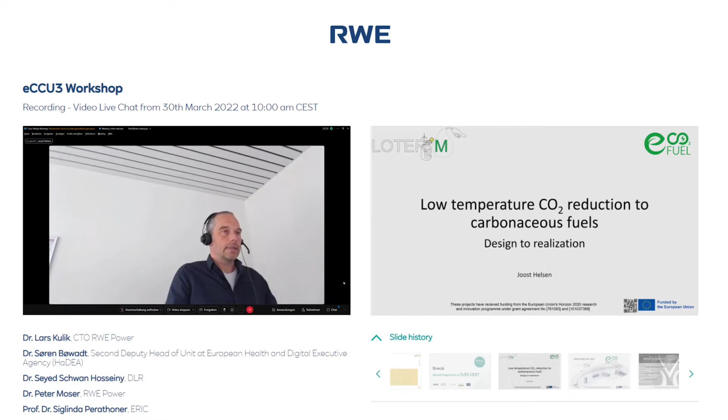Good afternoon, everyone. I will be taking you on a little journey where we move from a very small scale, like we saw in the previous presentations, also before noon, towards an industrial scale, or at least a demonstration scale. And I would be taking the opportunity to introduce and further explain the two projects that were mentioned already quite a bit, the LOTERCO2M and the ECO2Fuel, as examples. Many of the pictures that I will show are from the LOTERCO2M, but I will also, of course, explain the ECO2Fuel upscaling. So if you can move to slide 2.

There, I would like to say that the evolution of a new technology ideally starts with an idea or a concept that is tested or proved in a lab at a small scale. Typically, initial testing of catalyst materials is done at millimeter square scale of electrode in very small reactors with only just a few milliliters of liquids, electrolytes. And once a positive proof of concept has been achieved, that can be the start of an upscaling trajectory.

Basically, only the catalyst species at that point still are under study. And generally, the focus in the lab lies mainly on activity and selectivity of the catalysts. If we upscale and we want to demonstrate the technology, also, of course, the stability will play a large role in that. The first step in this upscaling process, and you can see the different stages depicted in the picture, is to step to slightly larger electrodes, in the order of magnitude of 10 square centimeters, and work in flow cell chemistry.

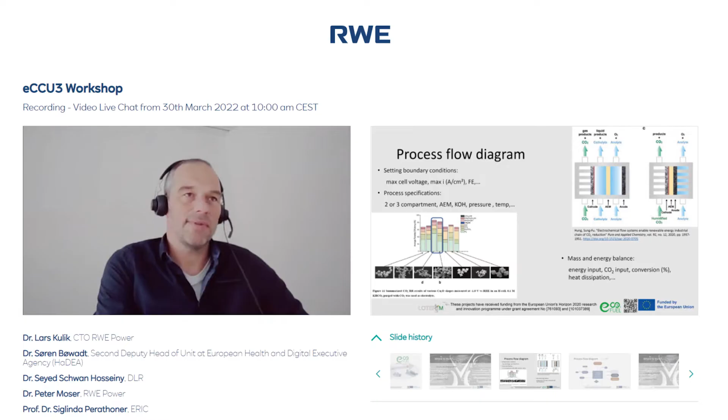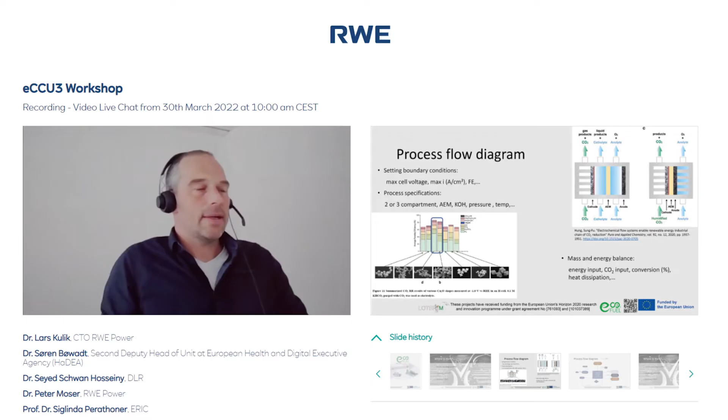On the right side, you see the configuration that is used also in LOTERCO2M and in ECO2Fuel, which is the humidified CO2 process, where CO2 is first humidified or mixed with water vapor, and then added to the electrolytic cell. So in this case, we have a 2-compartment electrolytic cell or stack. On the one side, we have humidified CO2, and on the other side, we have the anolyte, which is, in our case, an alkaline solution of potassium hydroxide. Slide 5, please.

So this would be then the process flow diagram for LOTERCO2M. But similarly, a process flow diagram for ECO2Fuel can be calculated based on the increased scale, of course. So what we see, we have a certain flow rate of CO2, demineralized water for humidification of the CO2. We have a 1 molar KOH supply towards the stack.

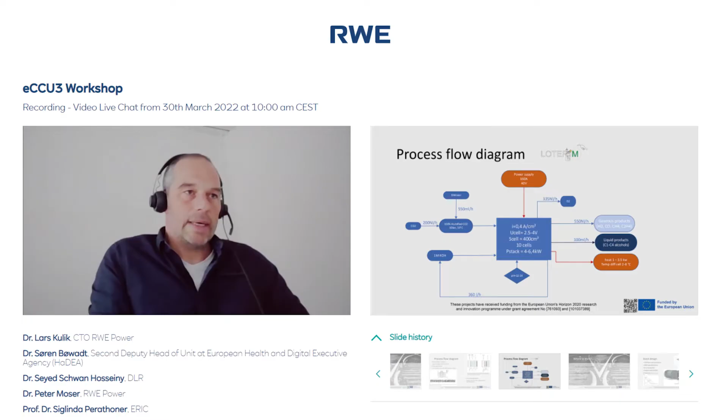Voltage and current are also indicated here in this picture that are needed to convert basically the CO2 to the carbonaceous fuels. And of course, in the outlet, we have both gaseous products and liquid products, and also heat. And it is also important to notice that the energy that is used for the stack for the process is partially converted into heat as well. Slide 6, please.

So once we have this basic mass balances process flow diagram, we can start designing a single cell and stack. Slide 7, please. And what's important here in stack design, actually a lot of things are important, but I will, let's say, strike upon a few of them at least. And one of the main things is the cell flow characteristics.

Optimizing the flow inside the compartments of each cell is extremely important for having a good distribution of, first of all, CO2, but also, for example, a good evacuation of gases that are being formed, like hydrogen and oxygen, which are always present as well. So the optimal gas and liquid flow should be maintained in the compartments because the gas and liquid fraction strongly affects the overall cell resistance. And therefore we should avoid building up of too much gas inside the compartments.

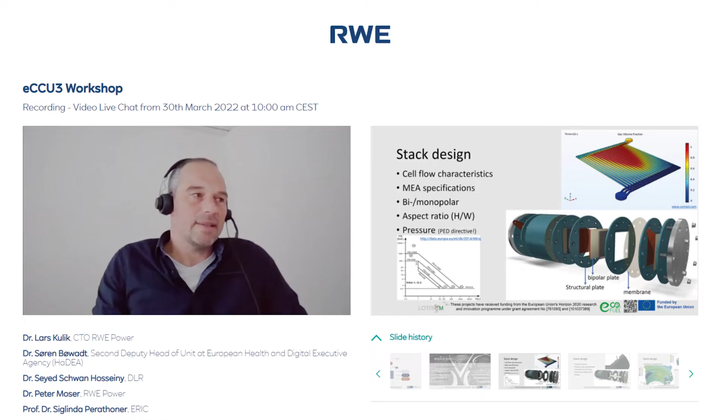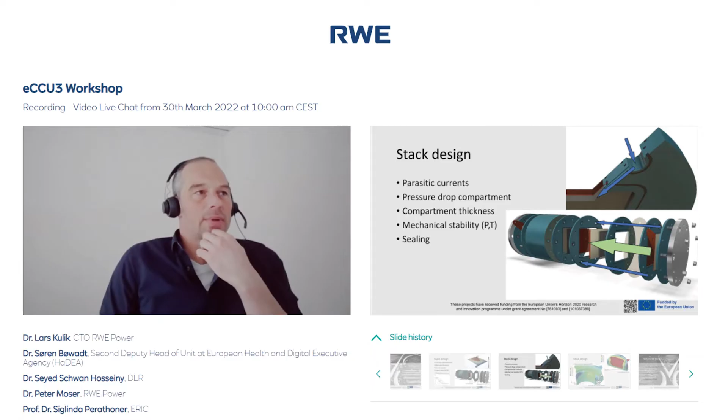On the stack design, one of the things that maybe sometimes are still overlooked is the occurrence of parasitic currents. And to explain this, I indicated in the blue arrows the existence of these parasitic currents. So the green arrow indicates, let's say, the main current that should be transported through the active area of the cell, so through the electrodes.

But since we have liquid flow, at least in one compartment, in the anolyte, there is a direct connection between the bipolar plates from one end to the other. So there is, let's say, a salt bridge between different bipolar plates at different potential, giving rise to parasitic currents. These are actually ionic currents that can partially decrease the efficiency of the system. So this needs to be taken into account during the stack design to make sure that these are limited.

And this can be done basically by two means, either by creating a high resistance of the electrolyte, for example, by lowering the conductivity, but that's not always possible, of course, or by reducing the section of the liquid flow channels, let's say.

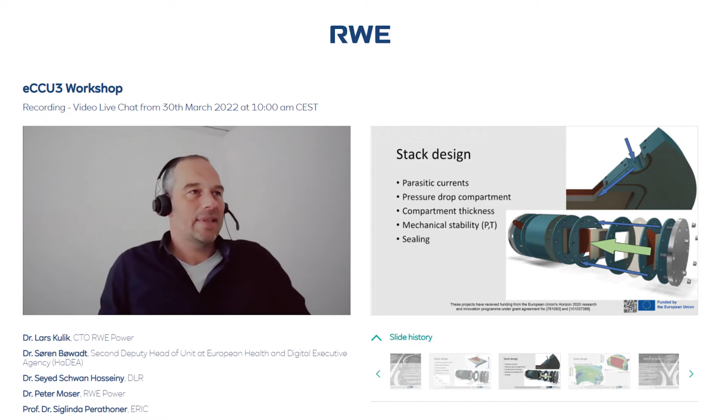Next to this pressure testing, also a manual and an EC conformity need to be in place in order to have this stack even operating at an industrial site. So these are things that you don't need to consider as much in a lab, but once you want to upscale, this becomes very important.

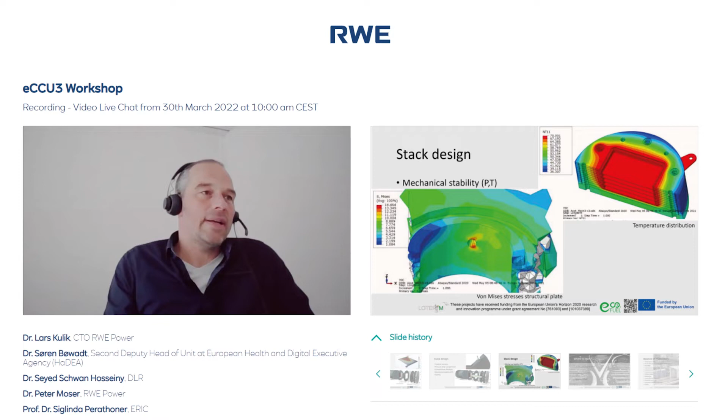So finally, I want to discuss with you the peripherals, the balance of plant, which is basically the surroundings of the stack being the heart of the installation. Okay, we go to slide 13.

The starting point when designing or when devising this balance of plant is the PFD, so the process flow diagram that I showed in the beginning. And after some iterations, you come up with a final, what we call P&ID, which is a process and instrumentation diagram. On this P&ID, we need to do an initial hazard analysis. This is very important to maintain a safe way of working.

So every component needs to be checked in relation to the other to make sure that all the hazards that occur in this balance of plant can be managed. Then after this initial hazard analysis, a list of components needs to be made. So this means sizing the components so that they have the right dimensions, selecting different manufacturers, types of instrumentation, for example. And then there is a purchase process, which is also quite evident, but still a very lengthy and tedious process.

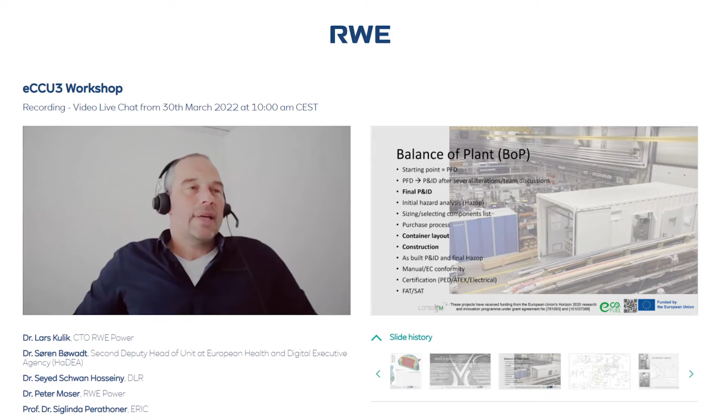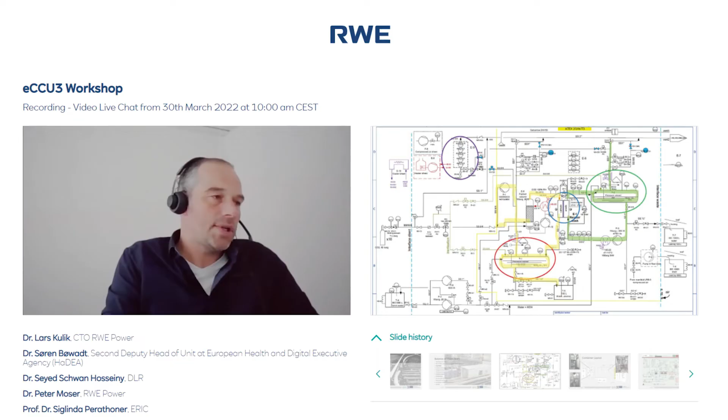The purple circle indicates the analyzer, so we can actually analyze all the gases that are produced on the cathode, and I mean all the main gases like CO, ethylene, hydrogen, of course CO2, oxygen. These are measured in the analyzer. And it's not just for process follow-up, but also a safety feature for detecting any mixing of oxygen and hydrogen in both tanks. If we go to slide 15,

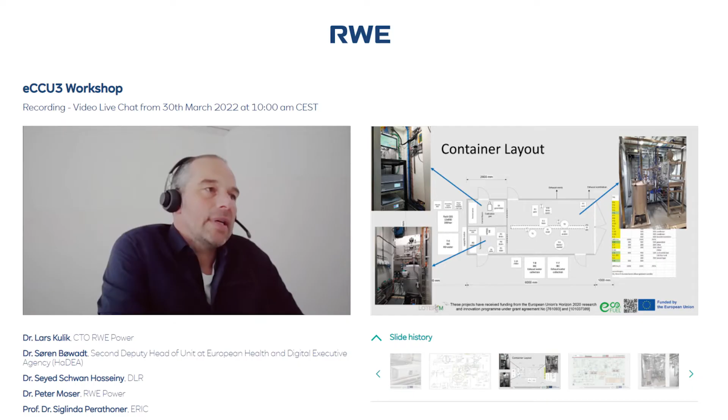we can see the container layout, so how it was designed and drawn before the construction, and some pictures of the finalized room. So we have the ATEX room, which is the picture on the right, referring to the right part of the container. And then the top left is the control room where the electrical cabinet and the PLC are located. Bottom left is what we call a wet room, where the compressor is and the supply of demineralized water and KOH tanks are located.

If you go to slide 16. 16 is then a visualization of the process control, the automation actually that is developed for the LOTERCO2M project. And as you can see, this is very similar to the P&ID, and this indicates also all the values of the most important transmitters: level transmitter, pressure, temperature, conductivity,

and also the indicators on the stack, so the voltage and the current going through the stack, and also the pressure regulation of the stack, because pressure regulation on the stack, especially at higher pressure, is quite challenging. We use dense membranes and there is no pressure balancing between the tanks. So all relies basically on good differential pressure measurement between anode and cathode, and also the control of the release valves of the anolyte and catholyte tank.

A lot of safety measures have been taken to ensure that the system shuts down in the event of an oxygen transfer, for example, to the cathode side. We always work with a slight overpressure towards the cathode because we are continuously monitoring the cathode gases. And then in the event of, for example, membrane rupture, we can immediately see any oxygen transfer occur in the gas analysis.

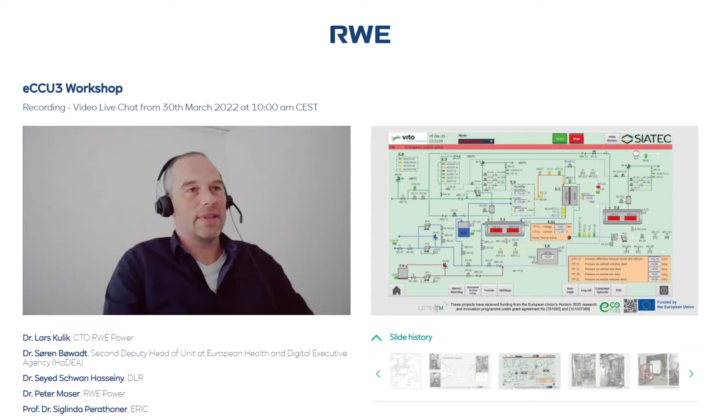Okay, I think towards the end of the presentation, just a few more pictures of the pilot with the view. These are in slide 17. These are the views of the ATEX room, so the explosive-proof room in the LOTERCO2M container.

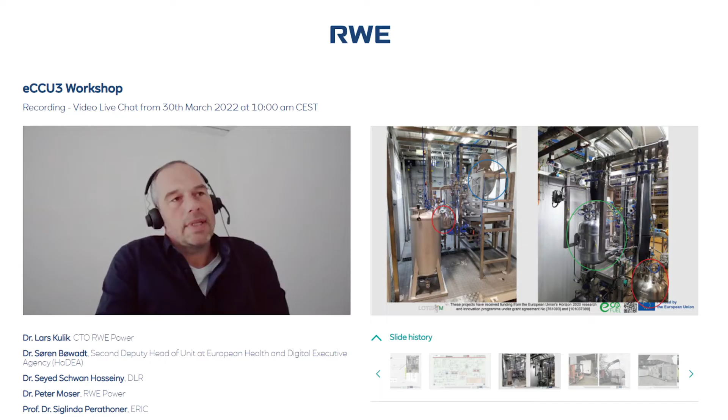And the red circle indicates the tank 1. As you can see, this is a 25-liter tank. The blue circle indicates the position where the stack should go, and we'll see later how it's installed there. On the green is the tank 2, which is the anolyte tank containing mostly oxygen, of course.

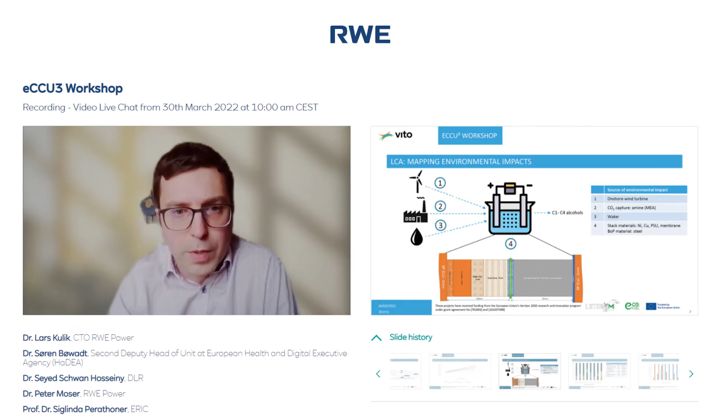That wind turbine will require a certain amount of steel and other metals to be manufactured. We also have a number of consumables in the process, and then of course in the heart of the reaction we have the stack, and you see a picture of the stack below. You see that there is copper involved, there is nickel involved there. So all those material uses we have mapped and obtained data from databases like ecoinvent, where you can find all this, in order also to make the comparison with classical fossil-based methanol.